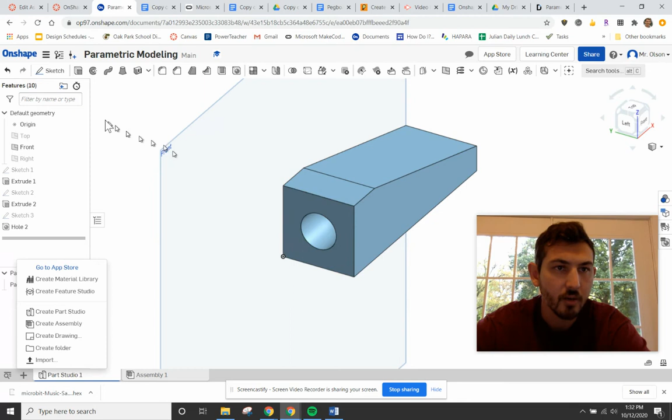So to do that, I'm going to move this out of the way, go down to the plus sign where it says insert a new element, and click on create drawing. I'm going to make sure I have my actual part open, my actual document, so that when I create a drawing it's going to be able to find it right away.

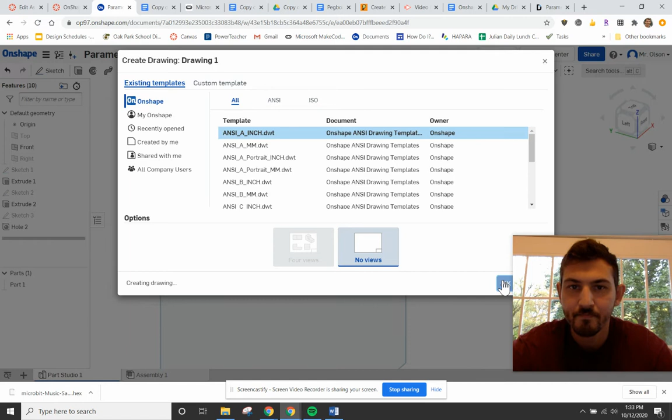If you don't have a recently opened template, on this Onshape button here we're just going to use the first one that's in inches. Once you have that, click on OK, hit OK again, and it's going to populate that drawing for you after forever. There we go. Now that you've done that, you can see your part's ready to be imported, so I'm going to click on part one.

Right off the bat, it's going to want to give me that front view, which is great, so the front view is going to go in the bottom left. I'm going to click one time, and it's going to place that object in there.

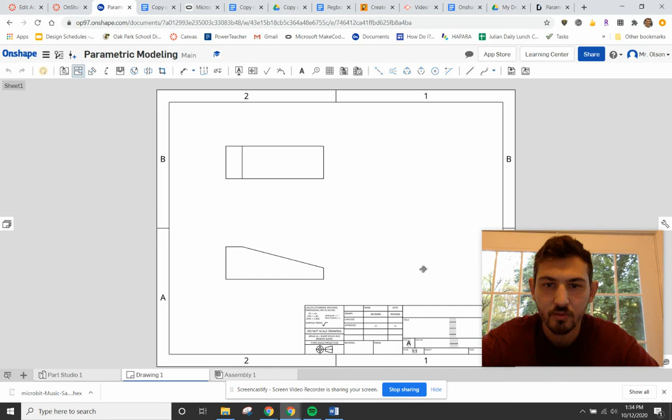Now if I move my mouse up, this is going to give me a top view, so I'll click again. I'm just going to drag my mouse back to my front view, and then when I move to the right it's going to give me a side view, hopefully. No, it's not, so I'm going to click on that. There you go, now it's going to give me a side view.

And then I'm going to click on this again, and when I go in the upper right corner it's going to give me my isometric view. Click. All right, so now I have my four views, which is exactly what I want.

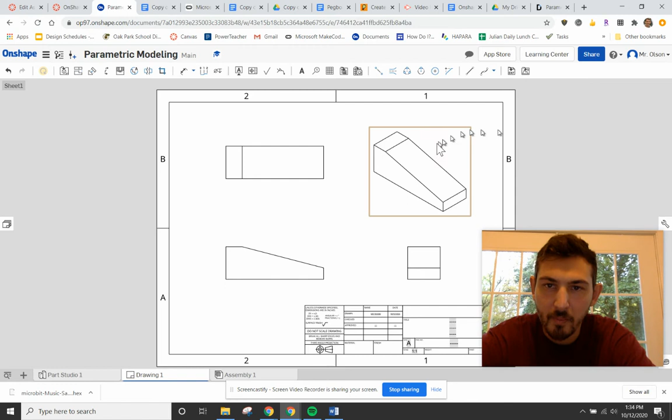One of the key things here is I want to make sure this is a shaded view, so I'm going to right click. Now it's trying to do stuff, so I'm going to escape out because I don't want to do anything like that. I'm going to move my mouse over, right click, and go to where it says show shaded view. That's going to shade my block in for me. Perfect.

Now the other thing we need to do is make sure these views are showing my hidden stuff, so I'm going to right click on this and click on view properties. Oh, I'm sorry, I can actually just go to show hidden lines here because that's what I'm going to want. There you go, now you can see that there is a hole there.

I'm going to do the same thing to my other views: show hidden lines, and I'm going to show hidden lines here too.

Perfect. Now what I want to do is put in my dimensions so people know how to make it, they know what the dimensions are. You can see our dimension tool is located right at the top, I'll click on that. Because we already did the dimension in the part file, we're not actually dimensioning it, we're just annotating it or writing in what the dimension is.

So I'm going to click on the line, drag out, click again, that's going to give me my length. My height, I'm going to go ahead and do right here, so I can click on this line, drag over, so there's my height.

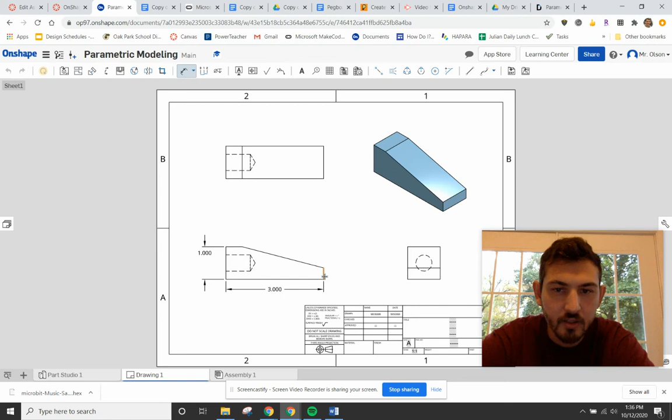I can do the height here as well, so that's 0.35, so they know where that line is. And I can also do the length from here to here, which is 0.5.

That's a lot of the features I want to do on here. I don't want to overcrowd it, so I'm going to actually move over here, and move on the right, or on the side view.

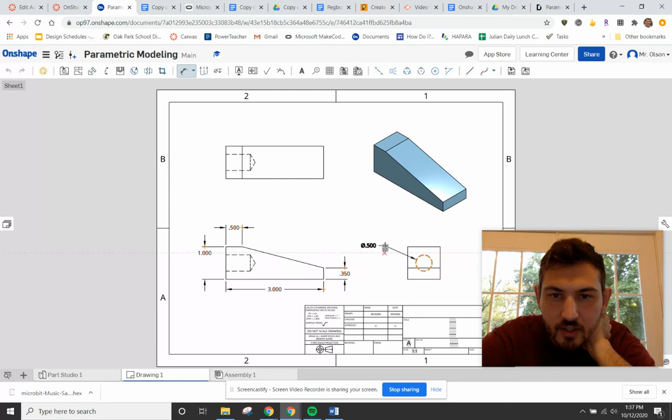To do the dimension of the hole, I can click on this and drag out saying, this is 0.5. Now I've done my height already because it's located right here. What I haven't done is the width, or when I extrude it, so I need to make sure that's included in here as well.

And then the last piece I need is the depth of the hole. I could probably do that right here, and I can fit that in right there. So now my depth is 0.75, my diameter of the hole is 0.5, and that really covers everything.

Just looking at this, you can see that that is a simple hole, and so you don't actually have to define that in any way. And that's everything you actually need in order to create that block.

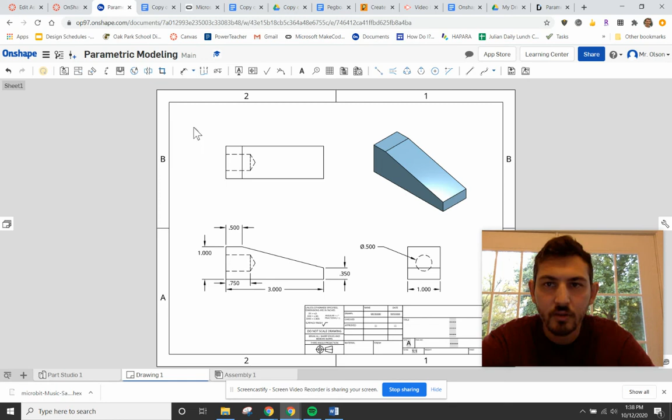I'm going to escape out of my dimensions, zoom in a little bit here to the title block, and move my face out of the way.

The problem I'm having is, once again, I don't have my mouse with me right now. So what I could do here is, you're going to see that it was drawn by me. This was auto-populated, which is nice. It has the date in which I created it. If someone checks your work, you can include that in here as well.

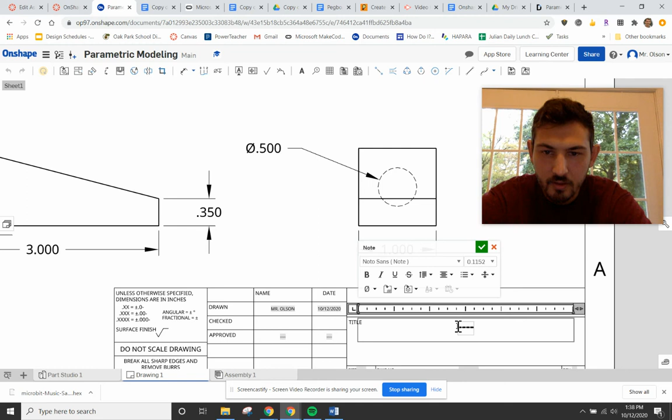And the title, I'm going to go ahead and delete these. I'm going to right-click, delete, right-click, delete. And this, if I double-click in there, I can now change this, say the title. So this is parametric modeling. I'm going to hit OK.

That size looks good to me, and that's all you have to change. So I now have my title. I made sure that my name was in here.

If your name isn't in there and you want to add it up here, that's okay, you can do that as well. You can add a text box, you can do that.

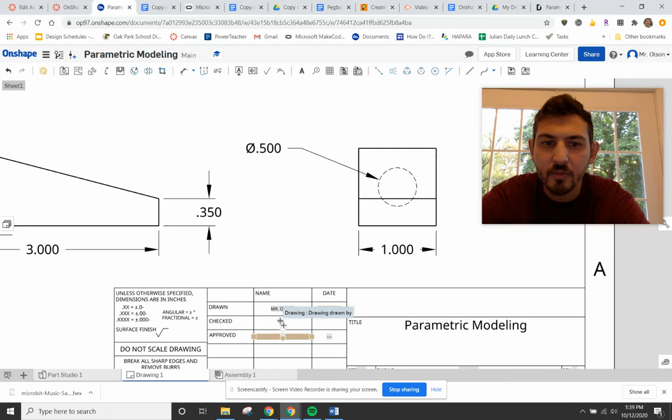You can actually just change it right here, so if I'm not going to be able to recognize your name, you can change it right here. It should be populating according to your login, so I shouldn't have an issue.

And then my drawing is done. So what I need to do now is make sure that I am saving this as parametric modeling, and then I'm going to end up printing it.

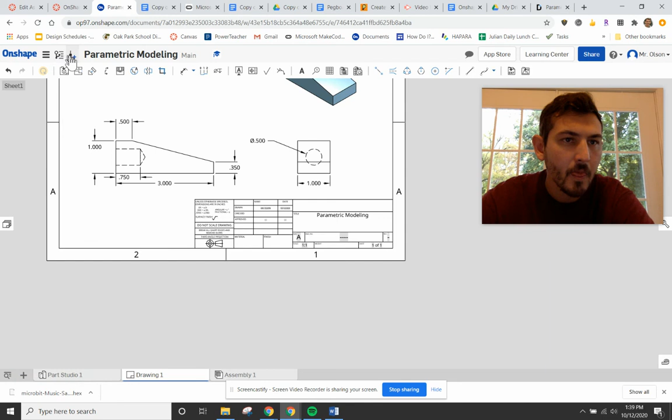So let's see here. I'm going to click on these 3 lines, I'm going to go down to where it says print. It's going to show me what my drawing looks like. Notice this looks different than the example I gave, that's because it's just a different program in general.

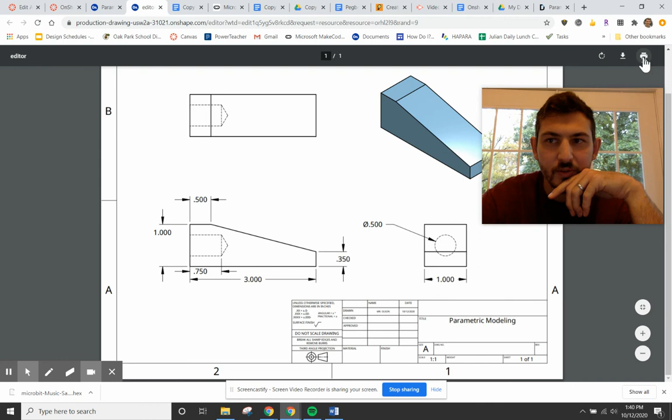Okay, so once I have that, you're going to save this PDF. So if I hit the print button up here, it's going to give you the option to save as a PDF. I'm going to hit save.

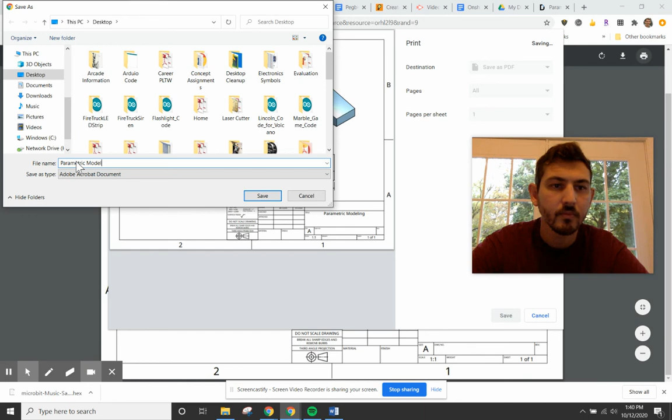And then you're going to save that file, and so I can say that this is parametric modeling. Okay, and then you're going to save that to your files, and then you can go ahead and upload that onto Canvas. And that is your parametric modeling activity and how to create a working drawing.